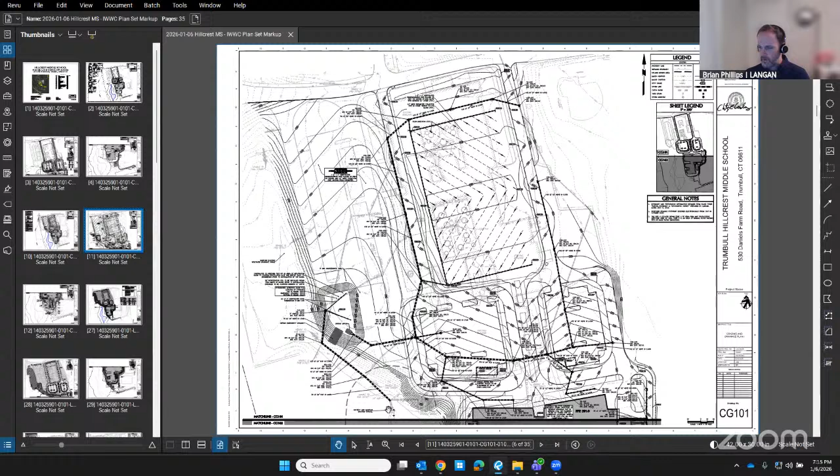And then all of the roof drainage similarly will be directed to a small pond here in the south before ultimately all of the stormwater, or the majority from our site, maintains its hydrology towards the wetland.

Here we have our planting plan, versus the existing condition of mostly lawn within the boundary of the wetland and outside of the existing wooded areas. We are proposing some meadow mixes, steep slope meadow mixes, which will be a native mix of grasses and perennials. We are also providing a robust program of trees, both to help reduce the heat island effect in the parking lot, as well as some trees along the wetland in the upland review area.

So we are trying to improve the situation. Out there now, there are very few trees surrounding the school and the parking lot. So we are proposing a program of new plantings as well as trying to install the meadow mix where currently there is lawn.

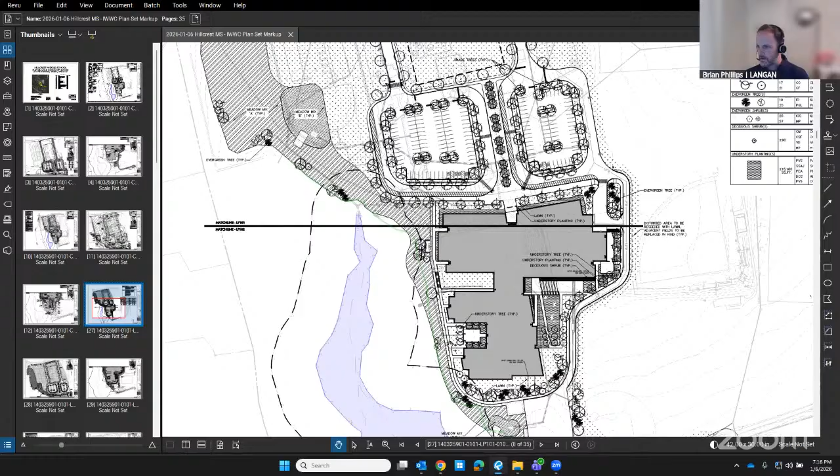And finally, I will just touch a little bit upon our erosion controls. We will have a double barrier of a silt fence and a silt sock in accordance with the recommendations of the Connecticut Soil Erosion and Sediment Control Manual and the Connecticut DEEP General Permit for stormwater during construction, which we will be filing for, as our project exceeds an acre, well over an acre in fact.

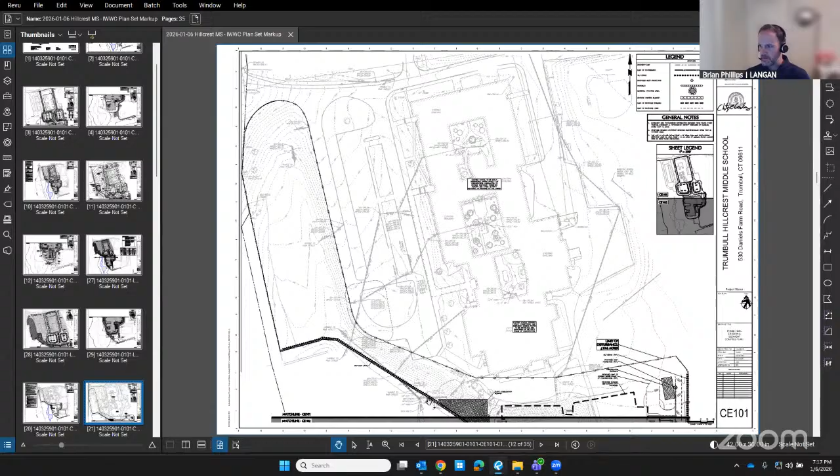So these perimeter controls up gradient of the wetland will be installed, maintained, and monitored weekly throughout the life of the project. Similarly, we will have traditional erosion controls installed around the project: inlet protection in all catch basins, silt fence even on the eastern side of the project where the fields are downstream, sediment traps as applicable, and construction entrances with crushed stone.

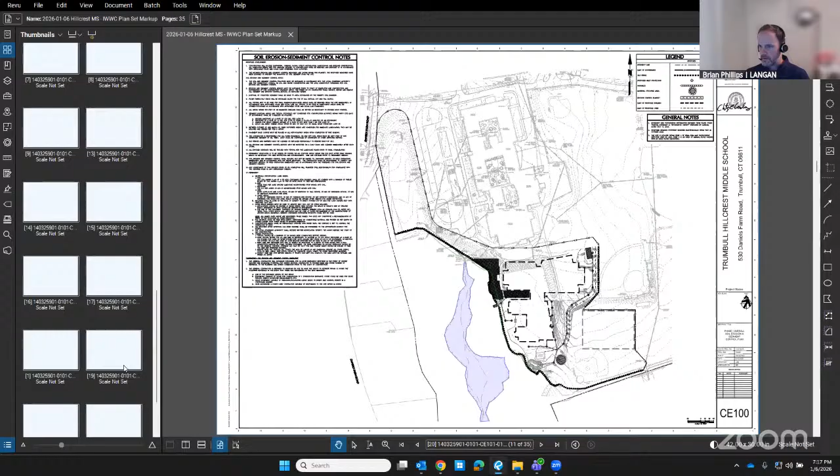And the project will be phased. We have an early iteration of the phasing here, where initially the construction entrance for the project will be off of Daniels Farm Road, and then staging will occur in the area between the road and the existing school to help maintain access to the existing school while the new one is being constructed.

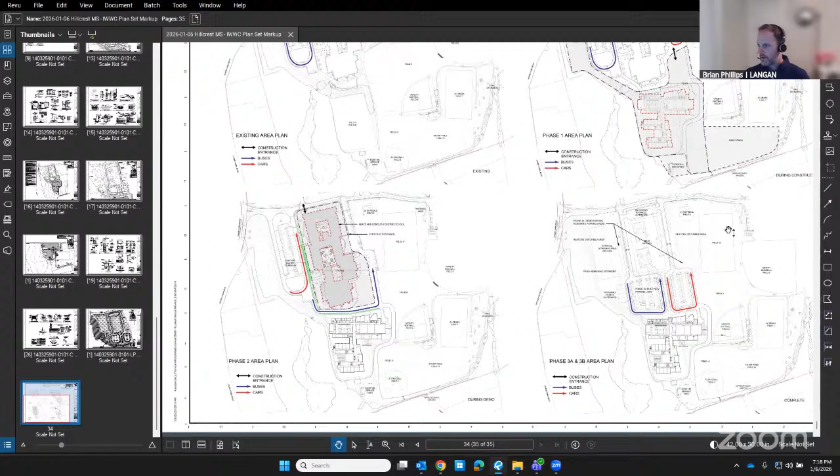Again, these perimeter controls will be kept in place throughout the life of the project and maintained. As the new school is brought online, we would then switch over to demolishing the existing school and finally finishing out the build out of the parking lots and the remainder of the fields.

I know I covered a lot of information there. I'm not sure if there are any questions or something we want to go into more detail on, but I'm happy to answer any questions.

Oh, I'd like to say, nice presentation. Thank you.

Tatiana or John Mayer, any comments? Thank you. Yes, very nice presentation.

I do have some questions about stormwater, but they don't really pertain to activities within the wetlands regulated area. But I also wanted to mention that because of the amount of disturbance, there may be a need for a general permit, Connecticut General Stormwater Permit. So just wanted to mention, if you guys are tracking that.

Yeah, we are working on it, tracking it. Because we disturb greater than 1 acre and it is a municipal project, we will be required to obtain the stormwater general permit. So we have begun preparing the stormwater pollution control plan and will be filing for that permit.

Okay, thank you. Through the chair, is that Rich Deecken? Yes, sir. Go ahead, Rich. Oh, just a couple quick questions.

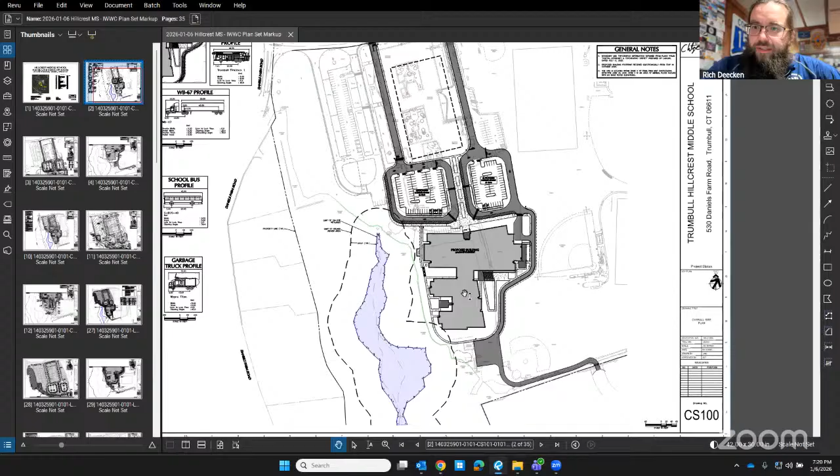So I had the fortune, or perhaps misfortune, of attending the school, and if you remember, there was in the western field, directly adjacent to Daniels Farm Road, there used to be a brook out there, and at some point in the 90s it was apparently buried. Over here, oh yeah, you can probably kind of see the evidence of it.

Do we know if that flow is being affected at all by this construction? Because obviously the water is still there, even if you can't see it. That's correct, yeah, this area must have been filled in many years ago, and currently it's sort of a gradual sheet flow down towards the wetland. So that will be maintained. There's currently nothing really proposed over here.

Okay, and the other question, if you could go a little lower - I'm looking at the JV baseball field, the one at the bottom. It was mentioned that no fields would be lost. If you look at the proposed conditions map, I love the polo grounds - 200, 250 feet down the line is really good. But in all seriousness, that foul line looks like you're going to squeeze that field in there. Are they planning on keeping that field as is? Because that's a really cramped baseball field in those conditions.

That field will shift to the east. It'll be reskinned and shift to the east, and they'll be able to wedge that in. Of course, in left center there's a pretty big hill going up to that softball field, which is on the upper right of that map. So they're planning on keeping it in the general vicinity and just shifting it over.

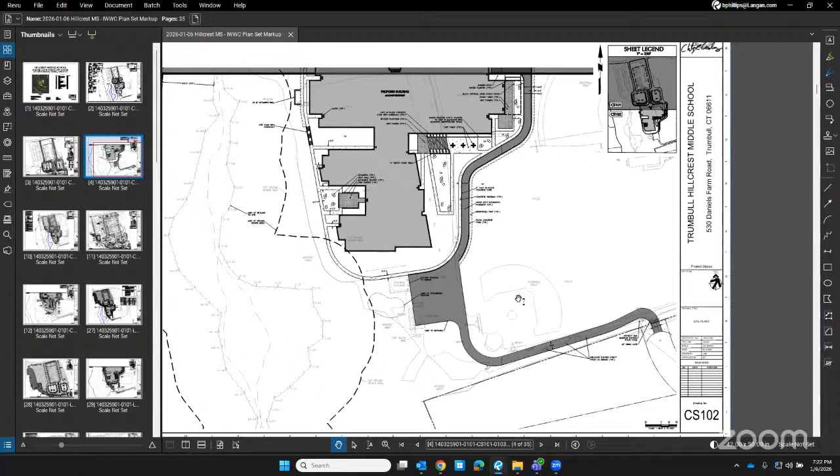Okay, it'd be pretty minimal then. Okay, yeah, well, it's an attractive target. The school is an attractive target for a lefty power or a righty power hitter. That's all, thank you.

Through the chair, go ahead David. I have not had an opportunity to review the planting plan or the plant list yet, but I will do that. I did notice that there were some plants on there that were questionable. There are alternatives, but we'll discuss that the next go-around.

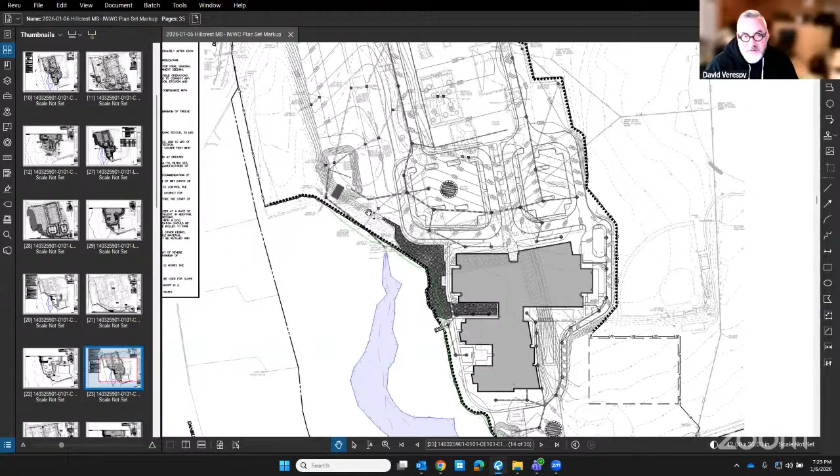It looks like there's an opportunity where, in the northern water control basin, there could be a chance to create a designed wetland, which could become a learning opportunity, an outdoor classroom type space. Was any thought put to that? It looks like a very standard detail for water control structures, nothing groundbreaking there, nothing crazy. But there is an opportunity, being that this is a school, if some sort of designed wetland could be included in that space or as part of that feature, as an outdoor classroom type space. Was any thought given to that?

It hasn't. This detention basin that we're referring to is intended to be dry. The water is intended to drain within 48 hours, so we're not intending to have any standing water in that basin. It's simply a water quality structure, as well as helping us achieve the peak flow reductions required by the Connecticut Stormwater Quality Manual. So it is not intended to be wet per se.

Okay, is there any opportunity to do some other best management practices, alternative green infrastructure, type drainage improvements here that would be something different than the standard fare? Yeah, I think we can look at potentially working with our landscape architect on installing some rain gardens. Along the perimeter of the school here, we could look at installing some rain gardens, which could also act as those teaching opportunities I think you're referencing, outside of the classrooms along the perimeter of the school.

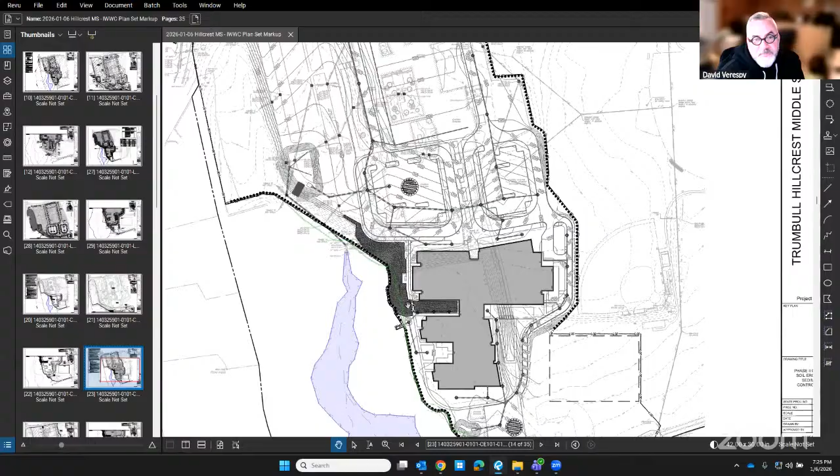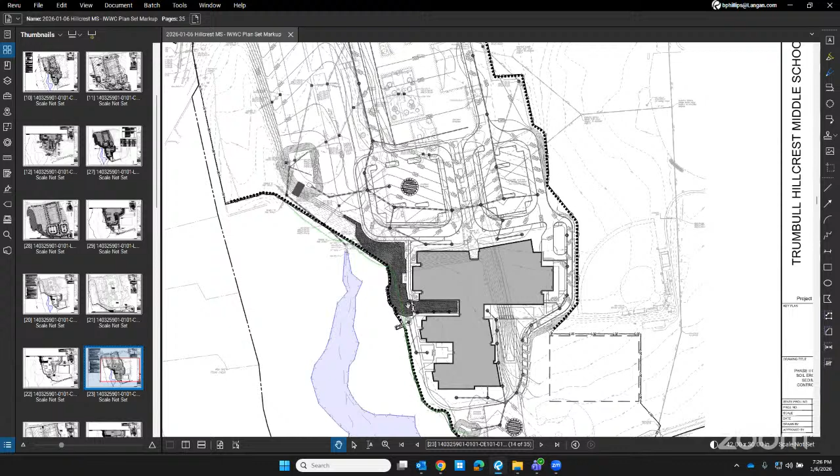Well, I like the idea of extending the educational opportunities to outside the classroom and taking advantage of this larger campus. So we'll review that with the educators and try to put some additional thought into that.

Great, thank you. Through the chair - good comment, David, because I was thinking, I looked at what St. Joe's has done and what Green Farms Academy does. And as you said, it would be a nice opportunity. And I think Fairfield High School, right off I-95, has an outdoor learning area as well.

Wouldn't hurt. All right, anyone else from the commission? Okay, John. Just a couple of questions. In the beginning I heard that there was going to be heating and cooling by geothermal systems. Where are those going to be located?

Approximately in this location, in the outfield of the JV baseball field we were talking about. That's correct, that's correct.

There's no above-ground structures for this type of system. These will be an array of very deep, small wells, about 2 inches in diameter, encased in 6 inches of bentonite. All of that piping will only rise to about 5 feet below grade, and they'll be ganged and routed into the building, all subsurface.

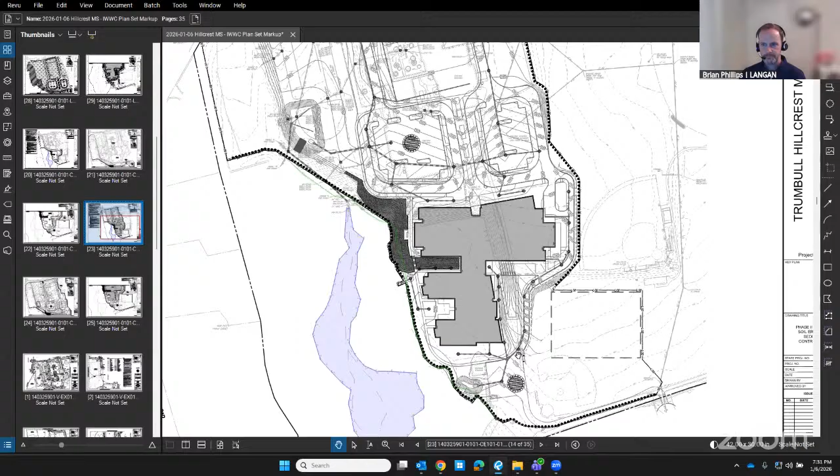This is Greg Sertica. Oh Greg, I'm sorry. It's okay, I can't see all of you on the screen right now.

Is there any fill coming in or fill going out? So the site is in a fill condition, so we will be bringing fill onto the site. Currently, where the proposed school sits, that field is lower than the elevation of the existing school, so there will be some fill brought in to construct the proposed middle school.

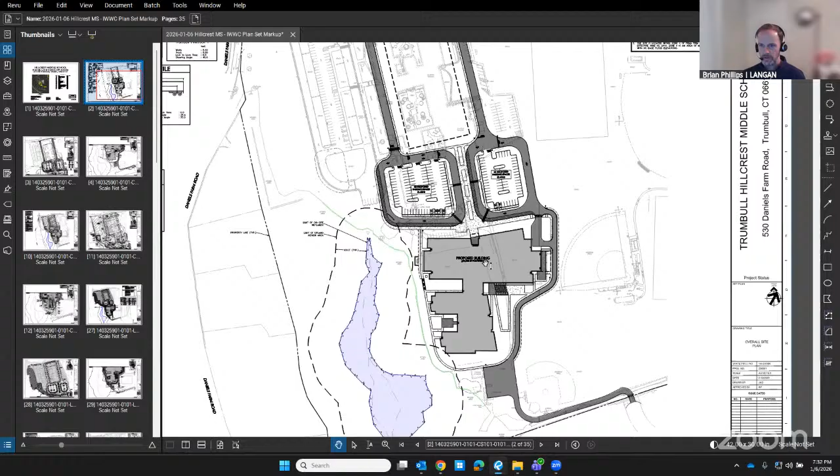Okay, and I'm assuming you'll have documentation on the fill that you'll be bringing in? Correct, this will all be clean fill, structurally suitable for either the pavement, the building, or landscaped areas accordingly, but it will all be certified clean fill. Thank you.

Through the chair, go ahead Bob. Yes, could they just review in more detail how the stormwater is going to be handled from the building and also from the parking lot? Sure.

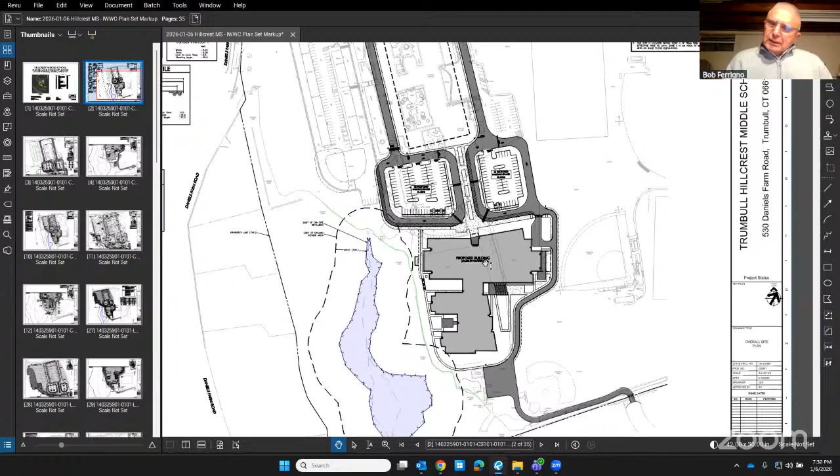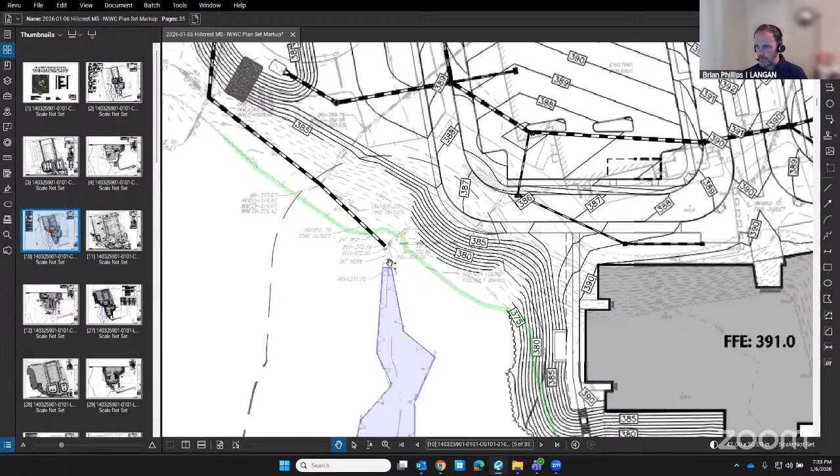In the existing condition, the entirety of the existing middle school and surrounding parking lots have their stormwater piped underground and discharged to an outfall at the northernmost point of Wetland 1. We propose to maintain that outfall, while the remainder of the stormwater to the south, in the field where the new school will go, flows overland, also towards wetland number 1.

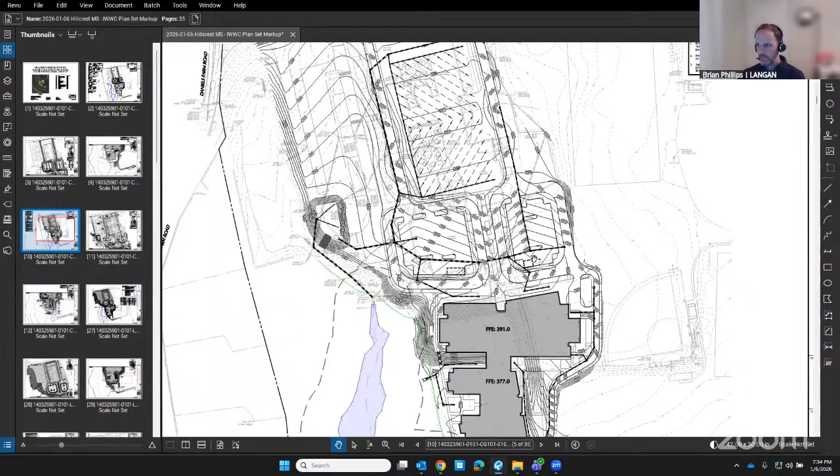In the proposed condition, roof drainage from the proposed school will be collected and piped underground to a small detention basin to the south, adjacent to the service yard. All of the stormwater from the proposed parking lots, the new field, and areas to the north of the proposed school will be collected in yard drains or catch basins and directed towards this detention basin.

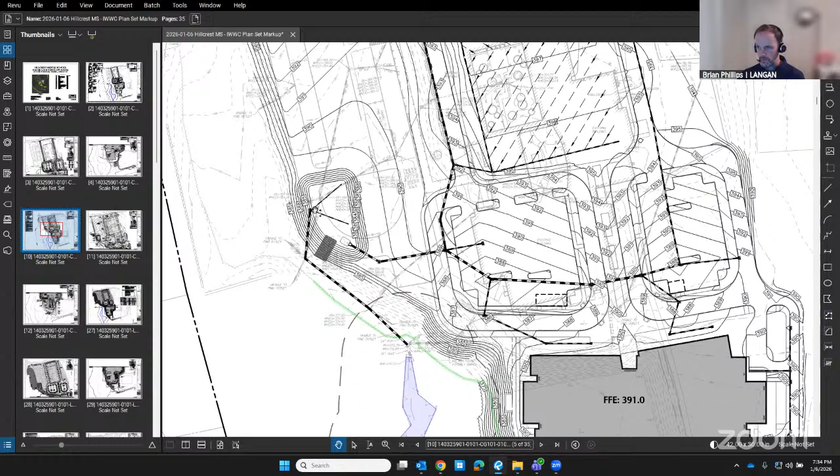Before ultimately discharging to that same outfall, we will have an outlet control structure within this basin which will control the outfall of the stormwater, and it will discharge towards this wetland.

I'll note that our proposed plan actually proposes a decrease in imperviousness, reducing it slightly from the existing condition. But with the peak flow reduction requirements of the 2024 Connecticut Stormwater Quality Manual, we are providing these detention structures to achieve a 50% reduction in the 2-year storm event.

On down the line up to and including the 100-year storm event, which we've analyzed the storms in between as well, we are proposing peak flow reductions for all of those storms up to and including the 100-year.

Additionally, we are providing water quality improvements in accordance with the water quality manual: catch basins with deep sumps, a hydrodynamic separator upstream of the pond to introduce a swirl in the stormwater flow and allow sediment to settle, and the detention basin here, which will be providing the water quality volume for the water quality storm, approximately a 1.3 inch storm event.

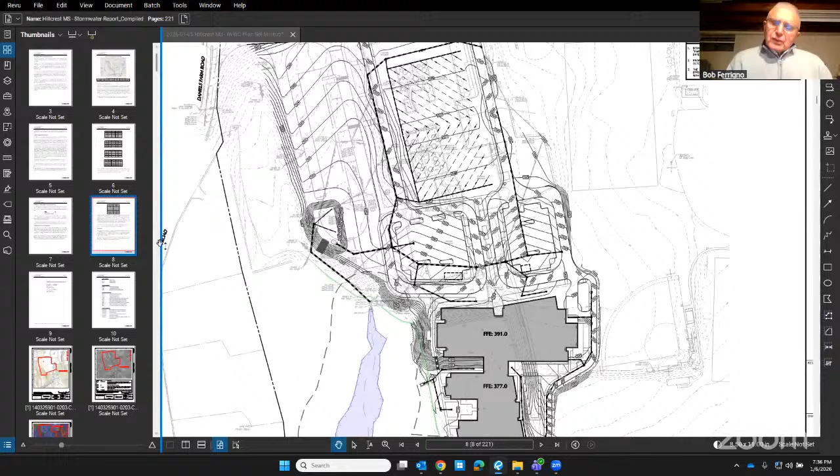What's the size of this retention area, the water retention area, approximately? The approximate amount of volume we're providing there, and the square footage. The square footage I can get for you here. Apologies, I don't have that number right now. It's about 8,000, approximately 8,000 square feet.

As far as the questionable material, that's being siphoned out before it hits this retention pond. Correct. The goal, with the catch basins with deep sumps as well as the hydrodynamic separator, is that most of the sediment from the parking lot is going to be trapped before it reaches the pond.

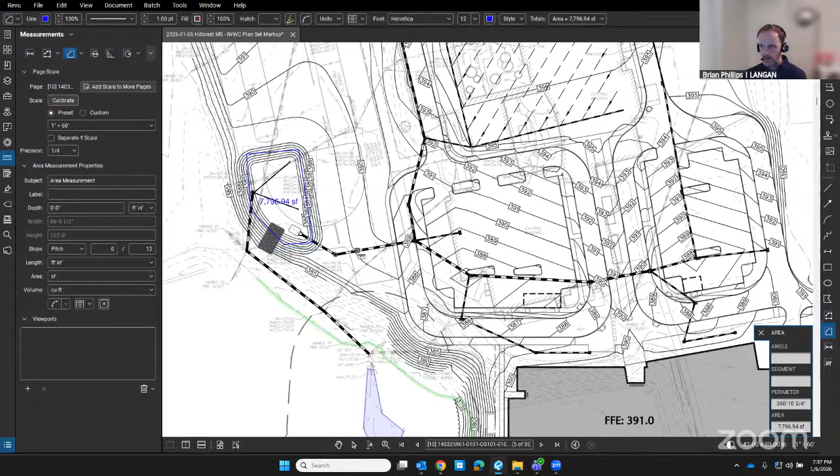Is there some kind of maintenance schedule the town or Board of Education will be required to follow for these sump areas? There is. We have included within our stormwater manual an operation and maintenance plan, which was included within our stormwater report and will be provided, showing cleaning schedules, et cetera.

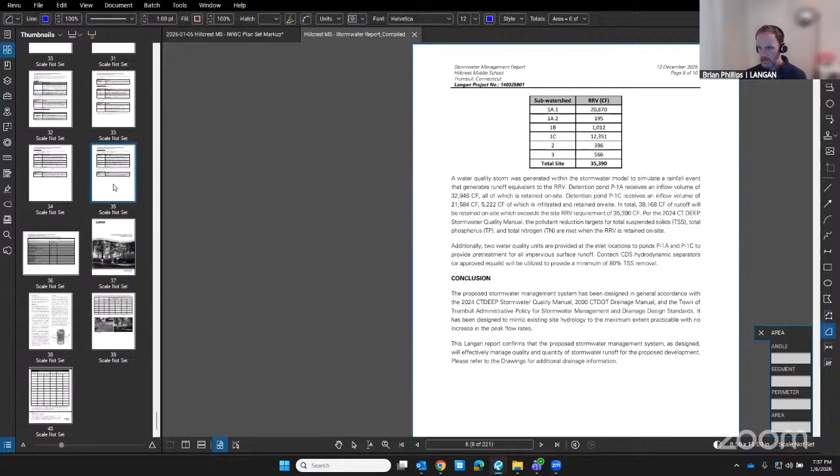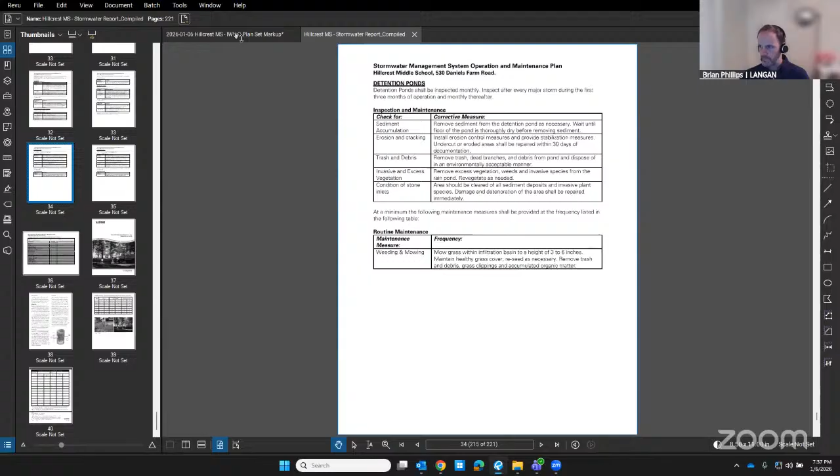We will have this down at the bottom: an operation and maintenance schedule, which discusses all the detention ponds and a timeline for regular maintenance. Thank you. You're welcome.

I'm looking at wetland two, and there doesn't seem to be too much going on there that will affect it. It's the Belden Brook, right? So just skim over that real quick, wetland number 2.

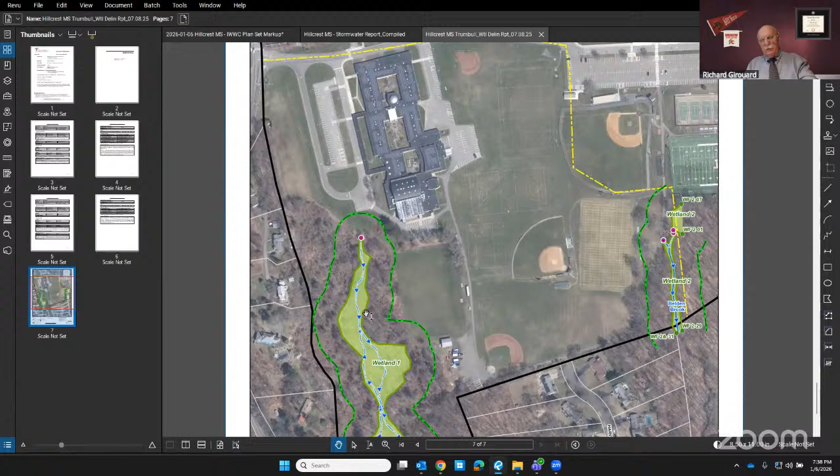We did have the site surveyed from the soil scientist report. When he went out there, he did delineate wetland number 2 over on the east side, and we're well outside of that wetland. So the plans only really show wetland number 1, here in the southwest portion of the property. I just wanted to make sure that's on the record, that we didn't skip over it.

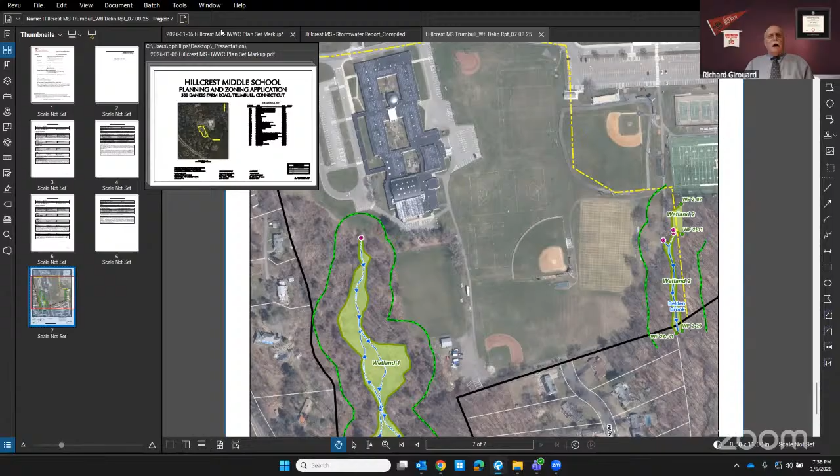All right, anyone else from the commission? Any other comments, questions?

Through the chair, go ahead David. Given that this is a public project, and I know there's minimal impact to the regulated areas, should this be scheduled for a public hearing in the interest of the public?

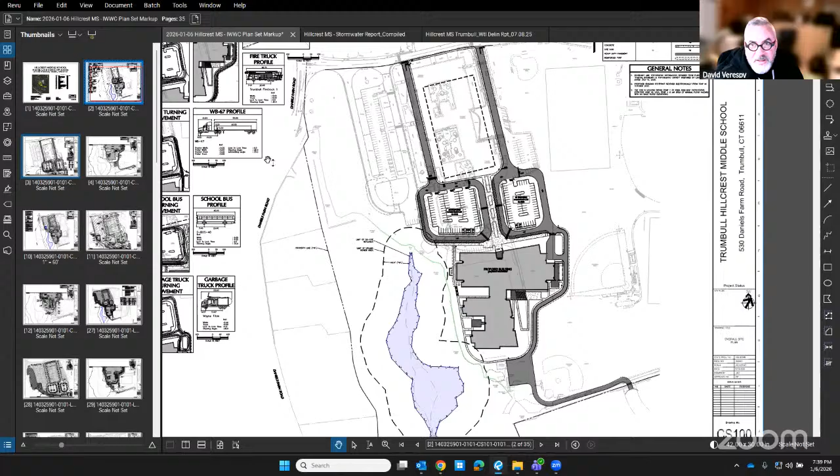My feelings, yes, because it's a big ticket item, and it's in the public interest. There's going to be a lot of questions on it and all that. The amount being spent is significantly more than $15 million, which is the trigger for referendum.

Question, Mr. Chairman. Go ahead, Bob. Is the public hearing going to be just for the wetlands, or another public hearing for the other parts of the construction project?

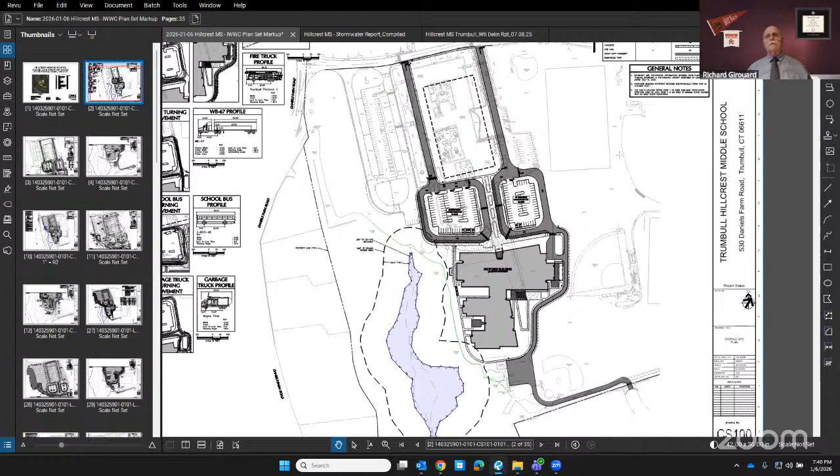I would assume P and Z would also do it too, because again, it's a big project. No, Mr. Chairman, they're immune to zoning.

Mr. Chairman, if I may. Go ahead, valid questions all. This project has been approved by an 8-24 referral by the Planning and Zoning Commission unanimously, so it does not go to planning and zoning. It's only a referral, whether positive or negative. It was positively referred. The town council has approved the project. The town has approved it by a referendum vote.

So I understand the concept of a public hearing for the general public interest, but I would advise the commission that the impact to the wetlands here is extremely minimal. You are barely touching the upland review area. So I don't know if you might want to reconsider that, because that starts a whole legal process that opens the town up to other things, and I don't know that is advisable, to be candid, based on what is before the commission. It barely is within the upland review area, and the impact to the wetlands, as the application demonstrates, does not appear to be of any significant nature whatsoever. So that's your legal counsel's 2 cents, and it's probably not worth more than that.

That's what I was going to go for, 3 cents myself, but okay. No, again, you pointed out if we're legally not obligated to do it, I agree with you. Less is more, as they say.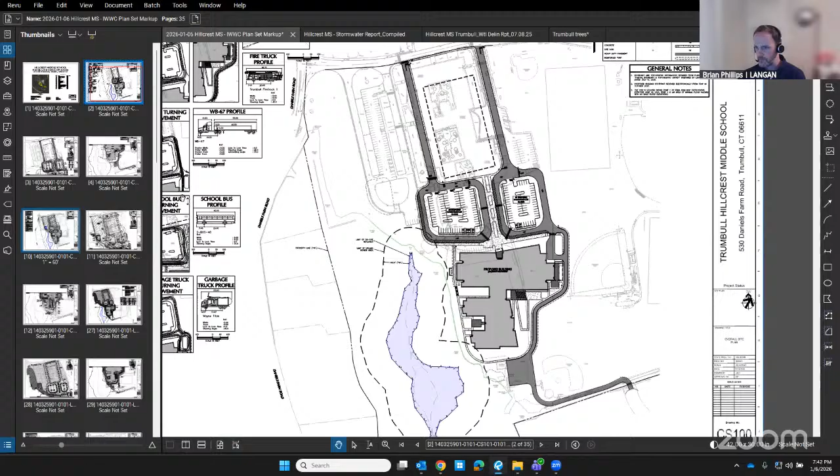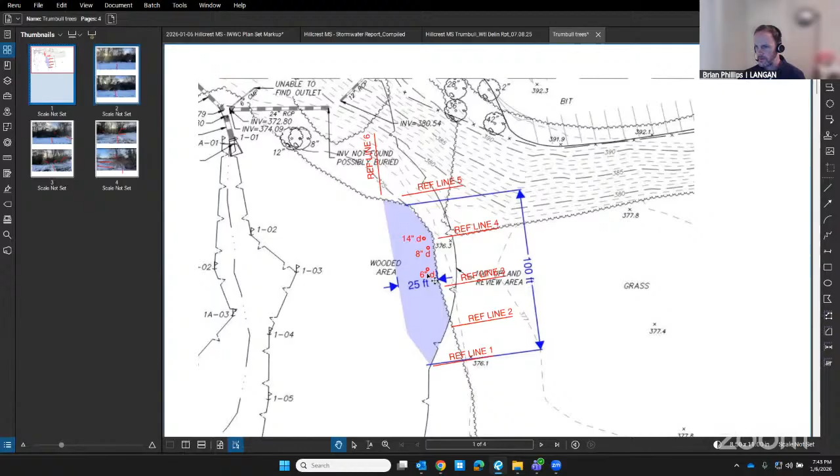So we did take a look at that. This roughly shaded area corresponds to the spot I was referring to, where we are proposing some modest clearing within a previously wooded, undisturbed area within the upland review area. Looking at that, we noticed approximately 3 trees of note within it. The remainder appears to be shrubby undergrowth, invasive sort of vines. This is looking at that space. So again, I think it would be a very minor encroachment that we're talking about here.

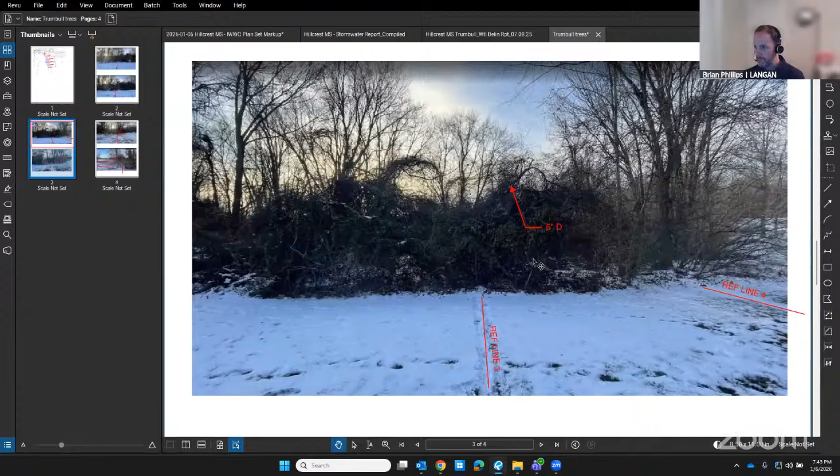Well, I think you just saved us a walk because it doesn't appear to be much there. Great, thank you.

Again, any other comments, questions? Otherwise, we'll move to the next application. Are we good? Yes. Anything else, Mr. Phillips or Mr. Scott? Nothing for me. I really do appreciate your time. Likewise, thank you all.

All right, so if we're good, we're going to move on to application 25-43, Aris W. Stalis. Permit approval for restoration and reconstruction of existing residence, landscaping, replacing driveway and front walk, and installation of a stormwater retention system within a regulated area at 201 Old Dike Road.

There we go. Welcome, commissioners. My name is Aris W. Stalis. I'm the principal of Aris Land Studio, a landscape architecture firm located now in Hamden, Connecticut. Last time we were before you, our office was in Bridgeport. We're here today to present plans for 201 Old Dike Road. We're representing the owner, ACI Costello Properties. We were before you about this project, I'd say 2-3 years ago.

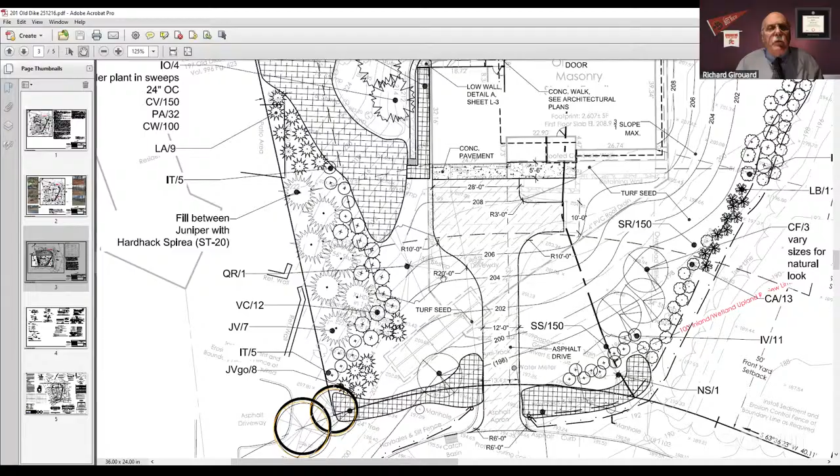I've got to zoom in on that area. Let me get down to the application. Are you saying to the left of the driveway? Yeah, as you're entering, where it's saying that you've got the junipers and the hardhack spire or something. Yep, hardhack spirea. So generally what's happening here is this, call it a vegetated area, starts adding to, absorbing some of those impacts.

And really, I wouldn't be concerned about erosion from that area. We can see today that it's actually quite stable over there, and I think these plantings will simply help with it. There will be some kind of finessing with the neighbor, since there is encroachment from the driveway area, but I'm sure everyone will come to an amicable agreement with those areas.

My only concern was I didn't see any ground covering per se, but like I said, that's Bob and David who handle that for us. So, hardhack spirea is on the plant list.

The elevation seems to be okay. The rise is approximately just a few feet, 6 feet or so, over 80 feet. So the elevations look okay. As far as the plantings, I haven't got far, like Dave.

Yep, no, I hear you, David. Sometimes those LAs are just a little... they just stay up too late working on it.

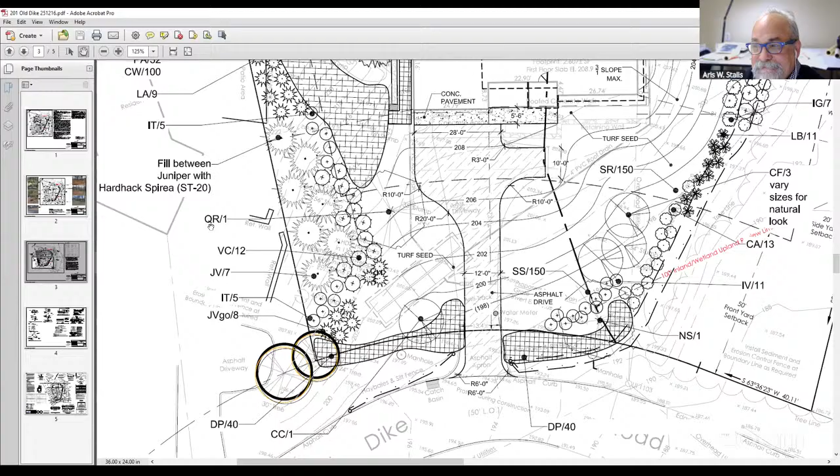Through the chair. Go ahead, Rich. Just a quick question in regards to this particular site of the road. Is this the house that's currently been unoccupied for some time? Yes. Okay, yeah, it's actually quite, it looks rough. I'm assuming it's been unoccupied for some years. Yeah, yes, it hasn't been occupied since, it must be 2023, I believe, when we started looking at it. It's not occupiable at this time. There's just too much water damage and things like that inside.

Understood. Thank you.

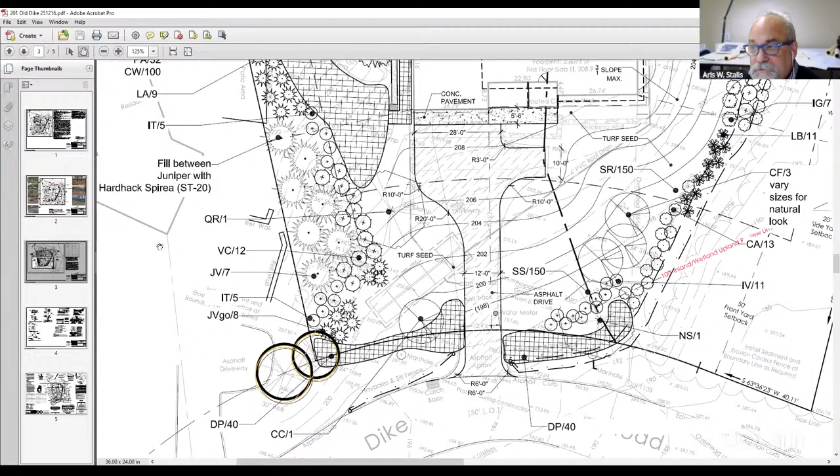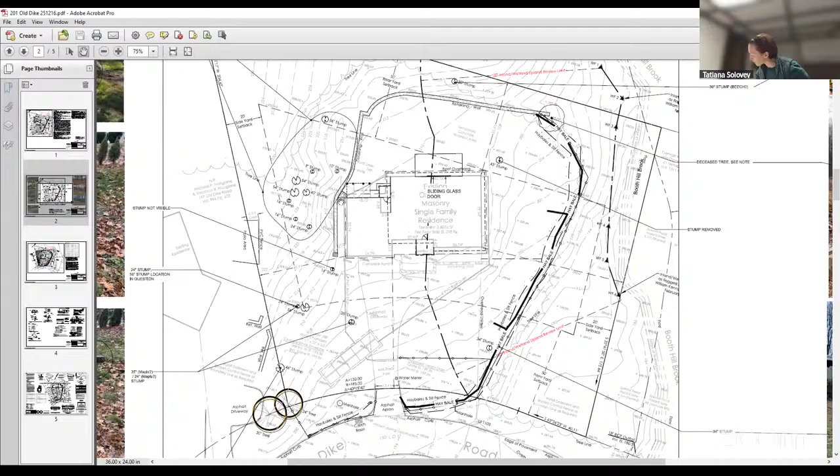Couple quick notes on the plan, the tree removal plan - it looks like there's erosion control depicted on that. I don't see a stockpile on that, if you could please add it. Well, there was a stockpile shown in this location on the engineering plan. Okay, thank you. The only time there'll be a need for stockpiling, which is minimal, is when they're putting in the drainage system.

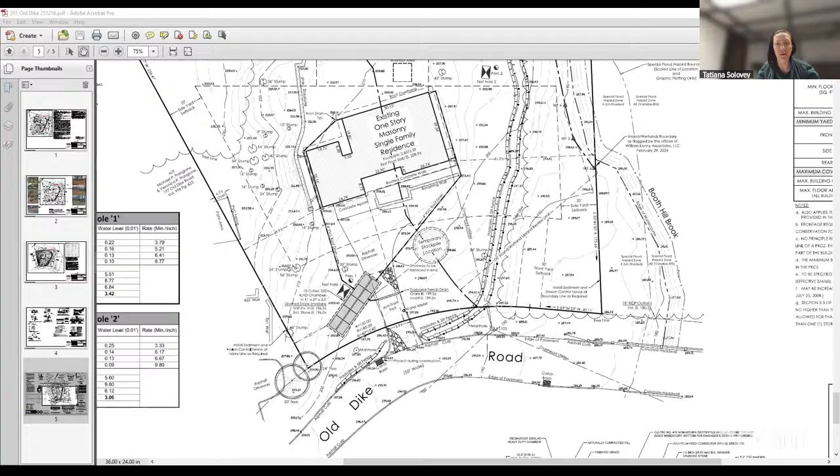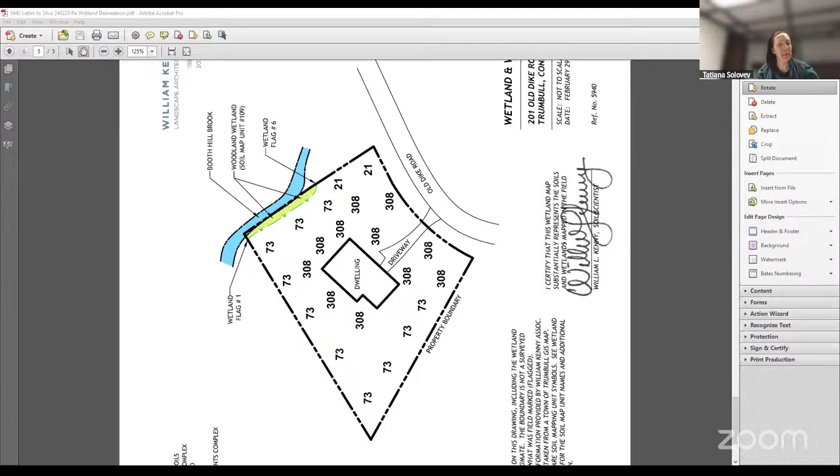And then the wetlands report - I'm not a wetlands expert, but the map depicts this apparent swale. Is it the determination of the soil scientist that it's not a regulated swale? No, the wetland map from the soil scientist doesn't actually show the swale. They don't show it on their schematic, but it's kind of off the site. The question is whether they've gone off the property and done any investigation there, because 2-3 years ago when we went there, there was a pretty clear flow. If there is any intermittent water course, the regulated area extends from that side. I'm not sure what the limits of the wetland scientist's investigation were.

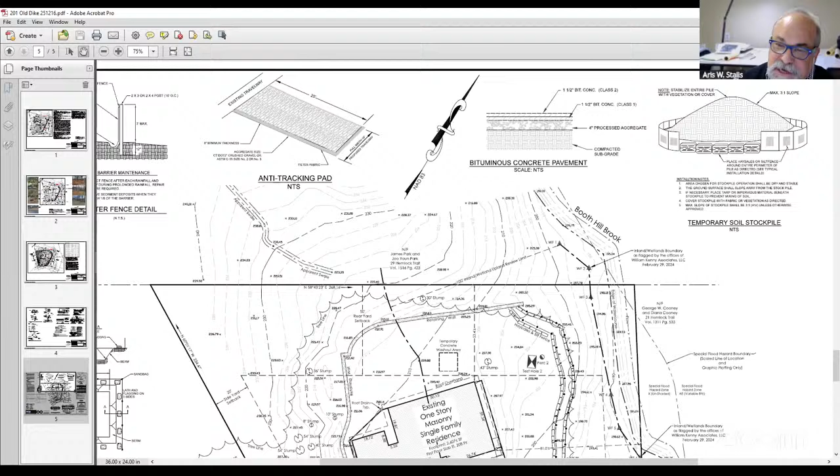I know they were directed to go to the site and look at it. I know they were asked to look at the swale. I'd have to follow up - I know he was asked to look at it, and the swale was part of it. Between myself and Washington Cabezas, when he went to have this done, we talked about it. So I think he simply didn't comment on it because there wasn't a water course in that location.

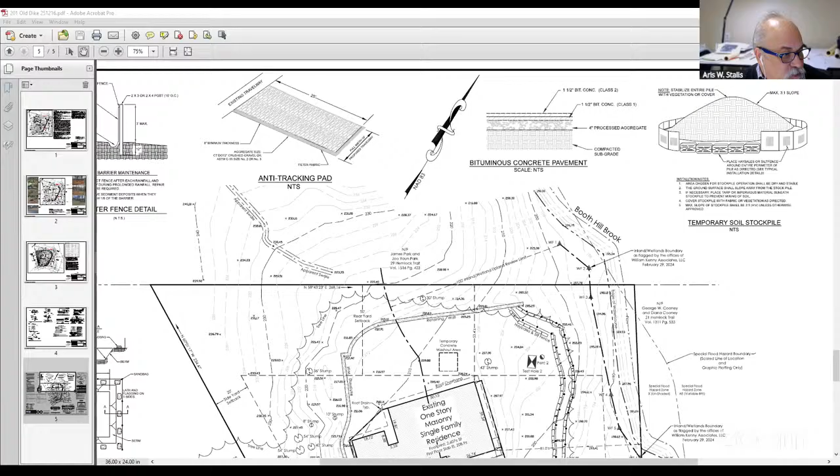Okay, yeah, I guess there should be some clarity because this was definitely a question from 2 years ago. So that's it. Tatiana, a question for you.

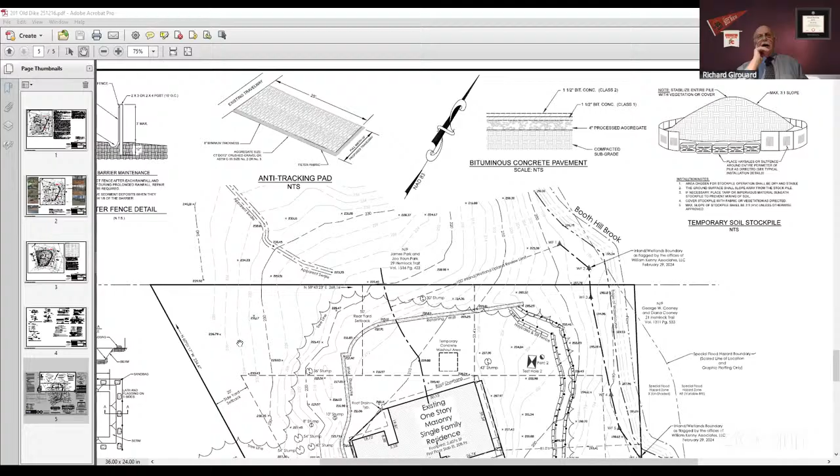When we went out a couple years back, did we know if any trees were taken down, cut, or removed? I'm trying to remember, it's been a while. Well, it was after the fact. So again, what are we doing for remediation for those? I haven't seen or heard anything on that.

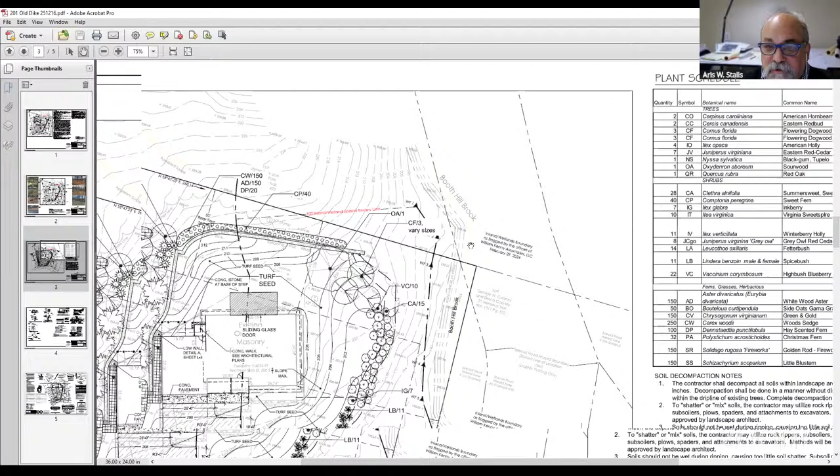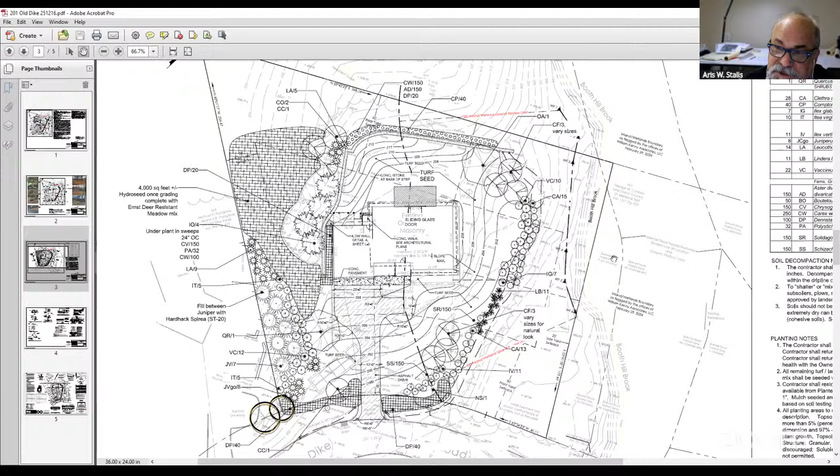So there was a number of trees that were removed, and addressing that is part of how we developed this planting plan, to do some habitat restoration. It's really a mix of mature shade trees - the Nyssa, the sourwood, a red oak - which generally need a lot of space. But we're also adding understory trees to help create balance in the landscape, plus shrubs like inkberries, Virginia sweetspire, leucothoe, spicebush, some blueberries. So what we're trying to do is not just put back shade trees, but actually create habitat.

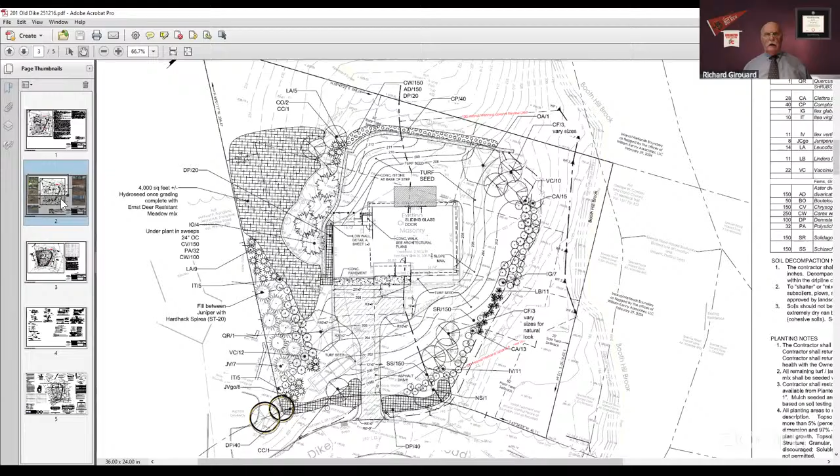Okay, Mr. Stalls, I think what the commission would like to see is a plan showing the removal of the trees, because when we first went there on the right-hand side, that was clear cut right to the Booth Hill Brook, and there were definitely stumps showing there. So I would think if you could do that for the next meeting, it would be helpful.

I think the commission agrees with me - we'd be looking at remediation for those to see what we... I don't know whether it was 5, 10, we're not sure, but I'd have to look back in what I had a couple years ago in my files.

All right, so if that's something you could do, it'd be appreciated, or Bill Kenny, one of the two of you. You agree, Bob and David?

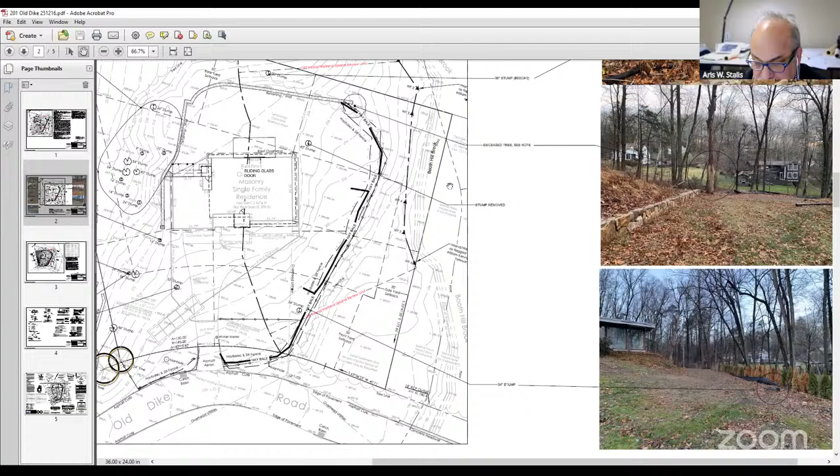Yes, yes, I think the location of the removed trees should definitely be shown. We may want to get some more shade trees along that edge to remediate what was removed. It looked like there were some understory trees there, some flowering dogwoods and stuff, which are cute. But the site might benefit from larger shade type trees, whether it's a red maple or something along those lines. I know there's a lot of tulip trees, beech, and oak up in that area.

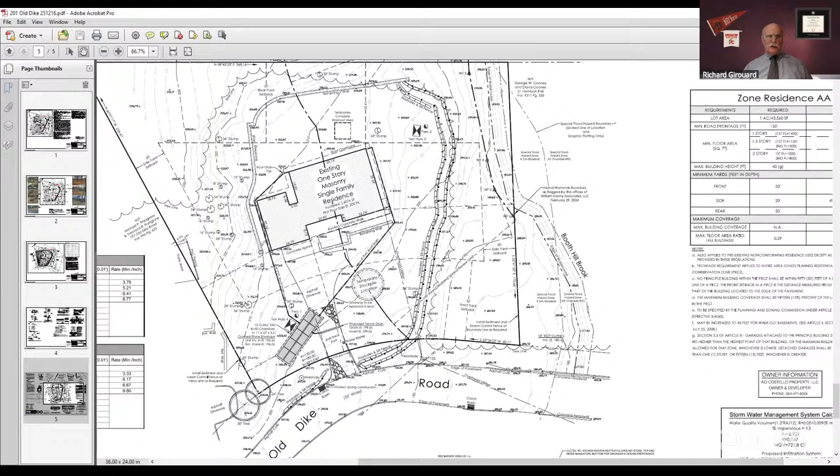All right, this is for John Mayer. John, I know when you go out, you always take pictures. When this comes in from Mr. Stalls or Mr. Kenny, can you compare it to your initial photos of what you took? Because as I remember, when we first walked the site, the right side was just clear cut, and on the left-hand side some trees had been removed. I think one or two were even removed on the neighbor's property, but that's the neighbor's issue, not ours.

So the survey had picked up the stumps that were on the site. That was evidence that the stumps were there.

Now, if you look at historical photos, for example Google Street View, there was a large oak in this area here. But it starts to become extremely challenging to quantify beyond the stumps that are here everything that's been removed, especially on the right side, uphill from Booth Hill Brook, simply because the evidence is gone.

When we looked at this several years ago, there was basically a stop order on this. Nothing should have been done from that point on. So what we saw then should be here now. That's what was done, and I know we have photos from the site that date back to that.

It might take a little work, but we have images from Google going back, and we have images from August of 2023. So we'll be able to go back to that and try to quantify it in a way.

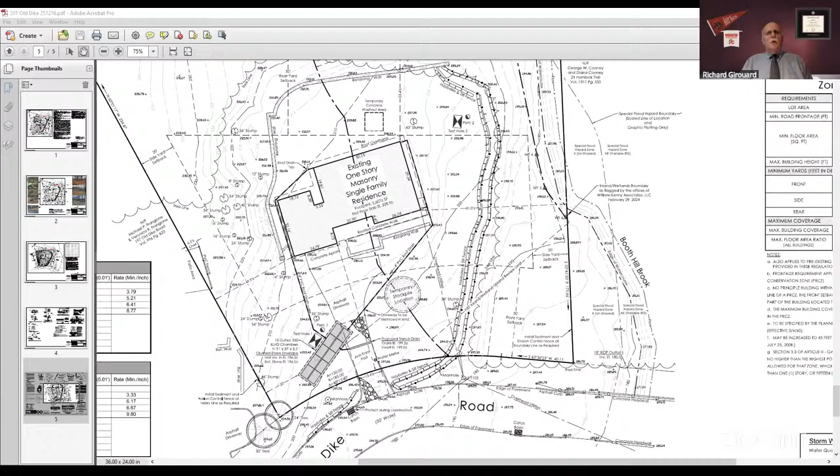All right, if you would, mark them so then we can determine the remediation factor. I believe Greg wanted to speak. Go ahead, Greg.

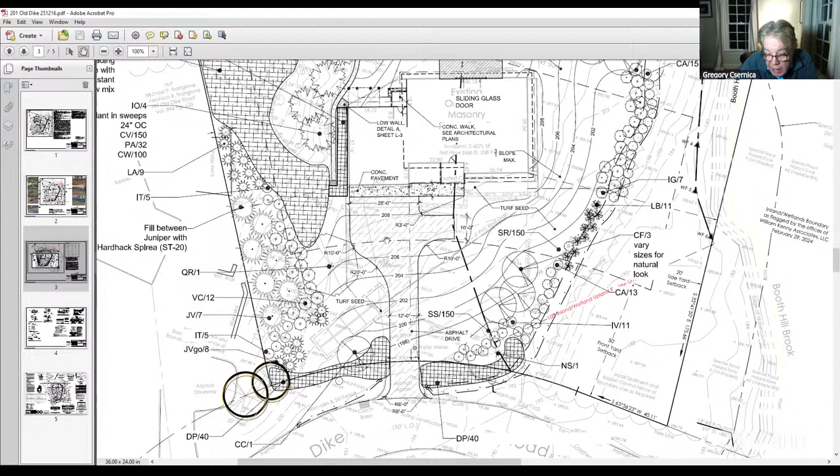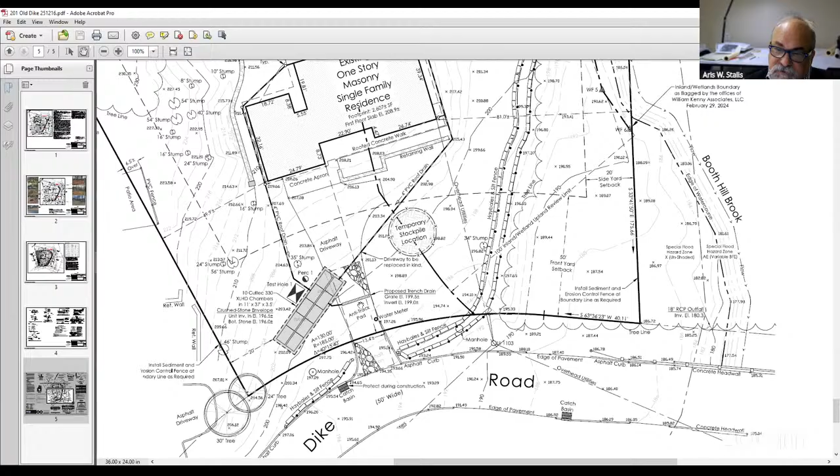Question for you. What was your asphalt driveway? I could see from your Cultec you're pulling drains off the house, it looks like. Is that driveway the exact same footprint? Is it larger than the original? And then based on how it's flowing, where's that water going? Is it just going to come running down to the street? Let me show the engineering plan. The footprint's close to what was there previously. So what we did with the driveway is essentially clean it up and try to create a level area up top. There is a trench drain at the lower end of the driveway that's intended to help in picking up some of those waters.

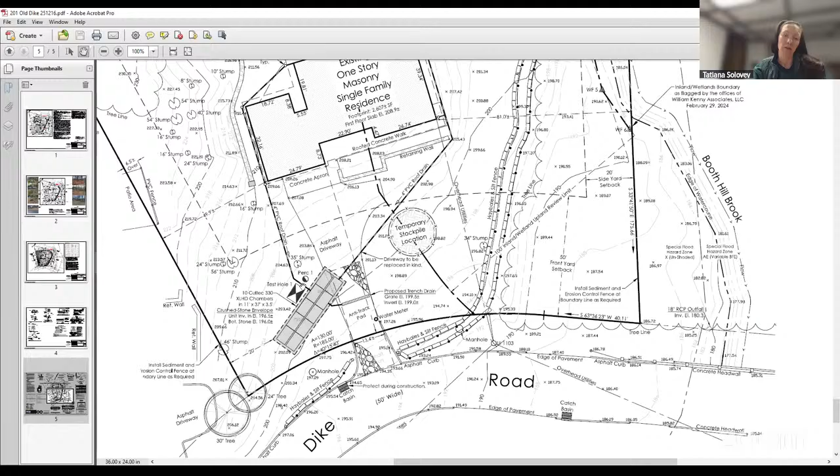I'll throw this to our engineering manager, Tatiana. Is the impervious surface, did you guys run through that calculation? Are we increasing it or staying roughly the same? We haven't done a review yet, great question. From two years ago, they were staying within the existing footprint, and the town's comment was that just the water quality volume should be treated, and this is what they have proposed with this application, but we will certainly compare that impervious coverage.

Okay, thank you. All right, anyone else from the commission? Mr. Chairman. Go ahead, Bob.

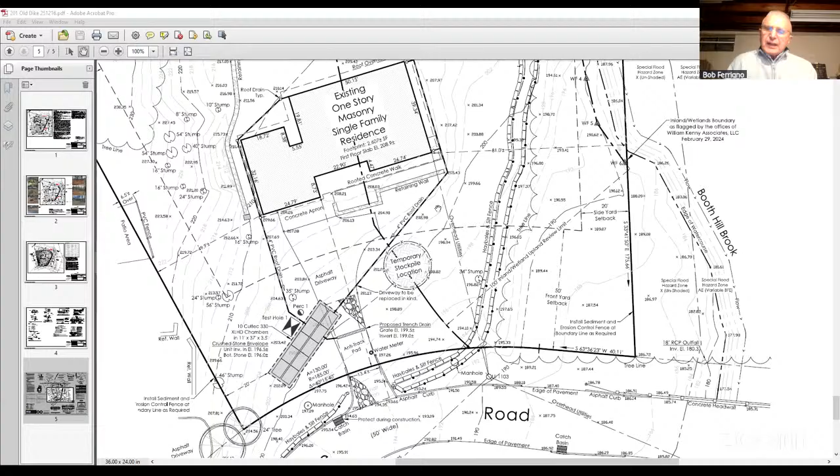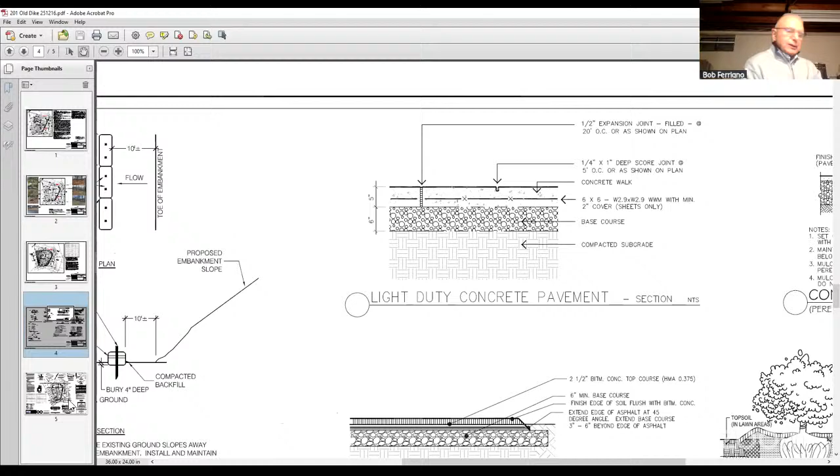In the maps that were given to the commission, there's three sheets. Do we have a copy of this where the Cultec is? You should have it, it was part of the package. I only have three copies. I don't see that. Four copies, I don't see the Cultec. Then that map that you have. Oh, there it is. Okay, I'm sorry, I found it. Thank you. You got me worried there. Sorry about that, we like to keep you on your toes.

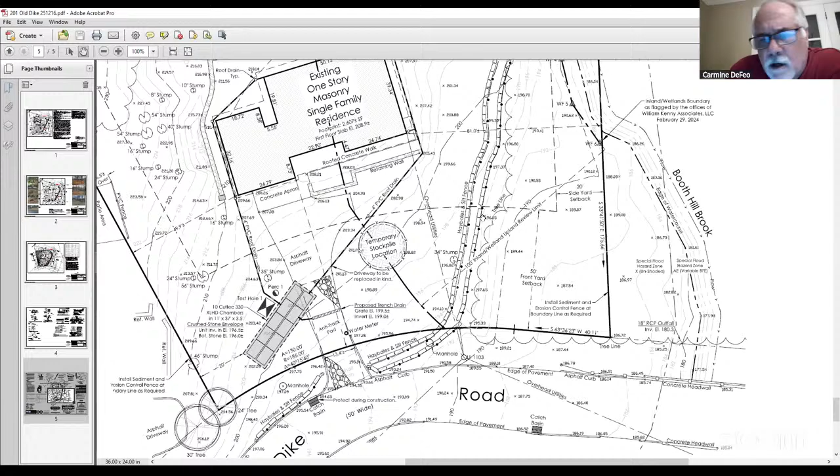Anyone else from the commission? Yes, through the chair. Go ahead, Carmine. As far as impervious surface, does that retaining wall figure into those calculations? You mean adding, like, if that wall? Right, because that's a new impervious wall.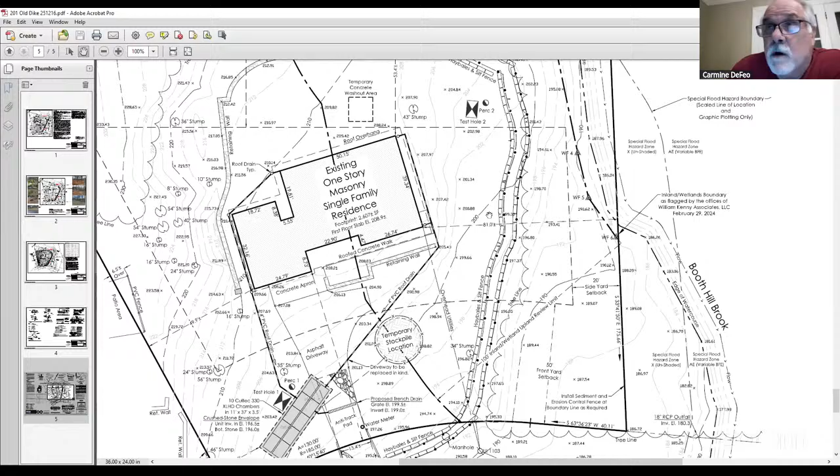The engineer's calculations, which are shown here, they are showing that for compliance there's a need to have 725 cubic feet of storage, and they're providing 883. So I'd have to check with the engineer, but right now we're above quite a bit of what's necessary to be in compliance. Yeah, but that wall was quite long and would be well over a couple hundred square feet of impervious surface. But I will double check with the civil engineer. Okay, thank you.

Anyone else from the commission? Go ahead, David. Just looking at the plans and the history of this property, the footprint is going to stay exactly as is, and we're just adding a second story above, correct? Correct. And any changes to the footprint would require him to come back to this commission.

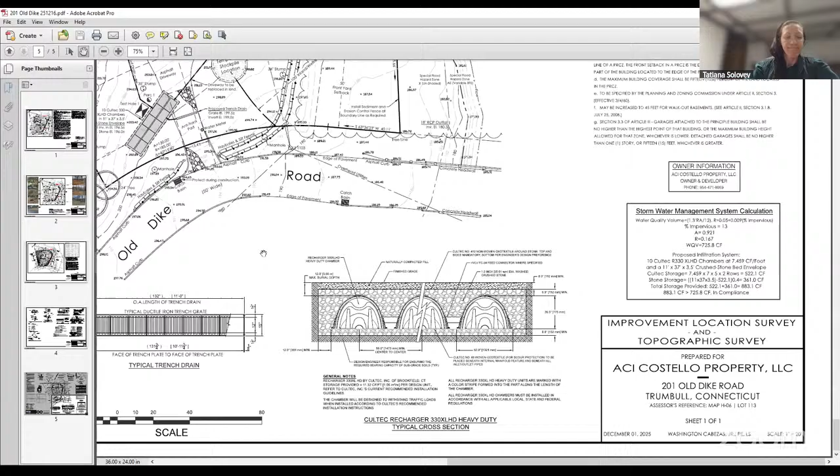Go ahead, Tatiana. Just really quick, also from last time, there was a discussion about posting a landscaping bond, and we have received an estimate for the plantings in the amount of approximately 28,000. I would also encourage the commission to consider a site monitor. Duly noted, as they say.

Thank you. Anyone else from the commission? Mr. Stellis, you're good? We're good. I appreciate it. Nice presentation, thank you. Go ahead, Carmine. Will we be walking this?

I have it down because it's been a couple of years ago, I'd like to go and see it again. Yes. As I said, the left side, the slope, I remember erosion then. The right side was clear cut all the way. So no, we'll definitely be looking at it.

That's going to be determined by whether in a couple of weeks we get rid of the snow. All right, we're good. I think you might. The next couple of days are going to be in the 40s, let's hope, and we need the moisture anyways, as it is. There you go. All right, thank you, Mr. Stellis.

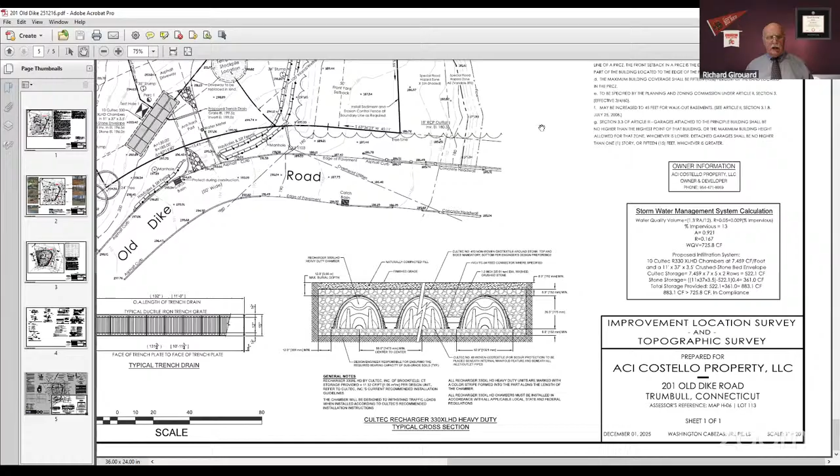That's unanimous. All right, we're going to old business, application 25-31, Henry Pan. Permit approval for change of grade, plantings, and removal of debris within a regulated area at 207 Tashwell Road.

Applicant has requested a continuance via email to the February meeting. Need a motion for a continuance, Greg, if you would. Yep, I make a motion to continue application 25-31, Henry Pan, permit approval to change grade, plantings, and removal of debris within a regulated area, 207 Tashwell Road, to February 3rd, 2026, with the applicant granting a waiver to extend the statutory timeframe. Okay, a second.

Somebody second? I'll second. Discussion, go ahead Rich. I know what you're going to say, but go ahead. You already know, what is his reason for requesting the extension? He's not prepared, and my thoughts are this: I would rather give a continuance than have them come in and do a half-hearted presentation that ties up the time. This way, hopefully, they'll have everything done in February for us, because there's quite a bit that he had to do, so that's why he's asking for it.

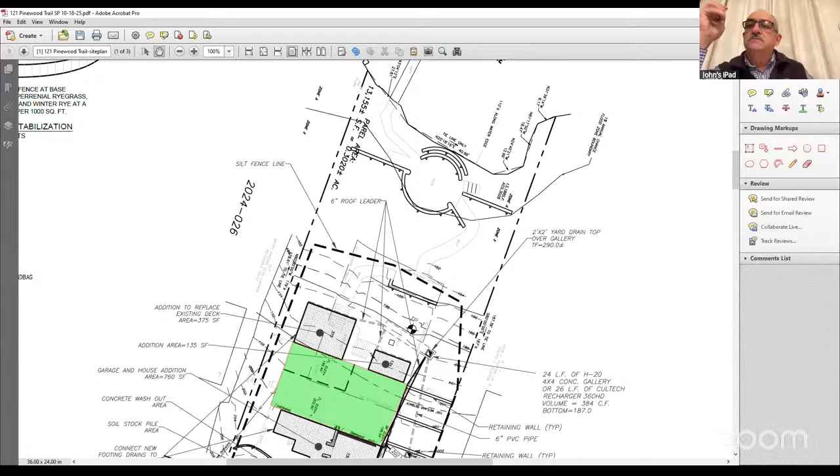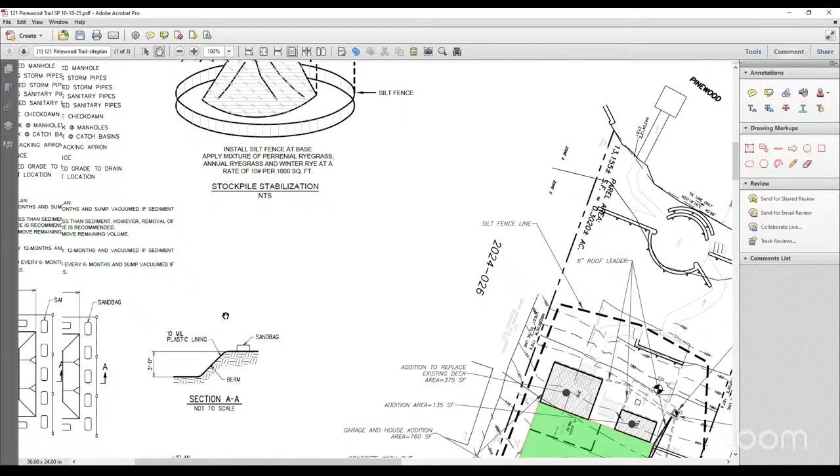Manny Silva again from Rose Tiso. The project has a full complement of soil erosion controls. We have an anti-tracking pad at the driveway entrance at the roadway. We have a stockpile area with silt fence around it, and an envelope of silt fence on the downhill side and the sides of the property to encapsulate the limit of disturbance, and also to keep any erosion during construction in this envelope area. We also have a concrete washout area so that when they pour the foundations, the trucks have somewhere to wash out, here, and not just anywhere randomly on the property.

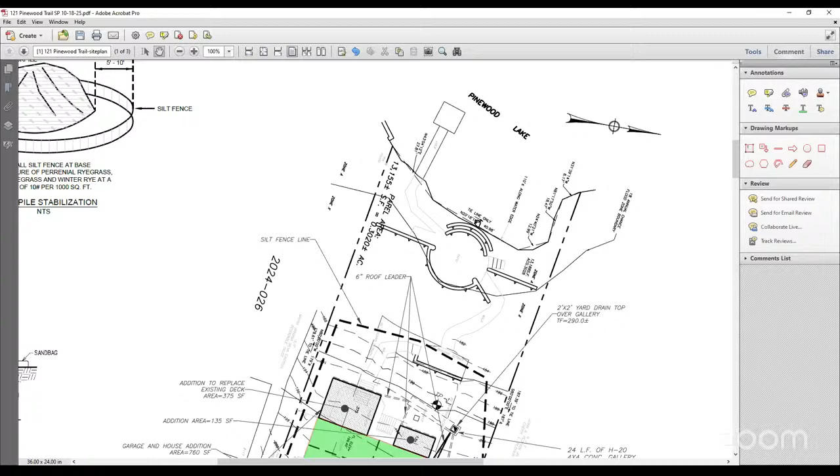The distance from our limit of disturbance and the silt fence line is a substantial distance from Pinewood Lake, and that would protect Pinewood Lake and the resource there from the construction activity uphill, which is here. All right, thank you. Any other comments, questions?

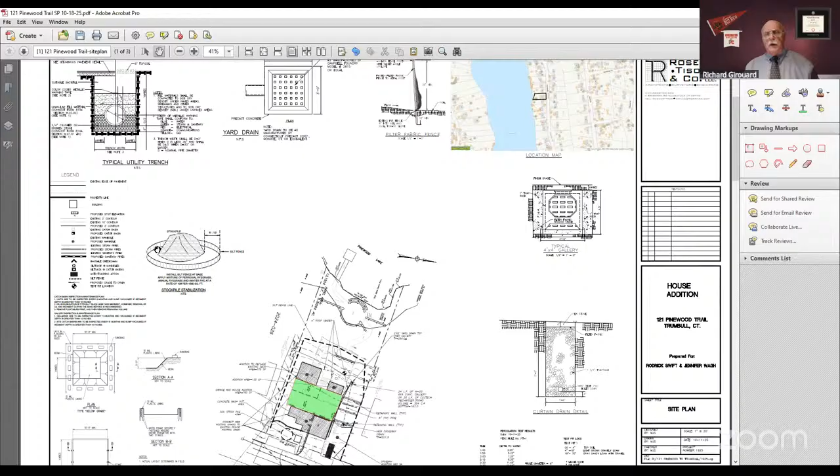All right, if we're good, if you can remove that, Mr. Silva. All right, if we're good, I'm going to go to you, Greg.

For a motion to approve as submitted with the following: I make a motion to approve application 2538, permit approval for additions to the front and rear of a house, install a rainwater system and stone walls, and remove 2 trees within a regulated area at 121 Pinewood Trail. In accordance with the following conditions from the Town of Trumbull's Inland Wetlands and Watercourse Commission: Section 1, General Conditions 1.1 to 1.10. And site-specific conditions of approval: 2.1, erosion controls need to be installed, inspected and maintained. And 2.4, limits of disturbance, again staked out and maintained. And Section 3, additional conditions.

Applicant needs to respond back to engineering. A letter has been sent to them. When was that dated, John? Dated today. Thank you. And then 3.2, applicant to add additional plantings at the end of the driveway.